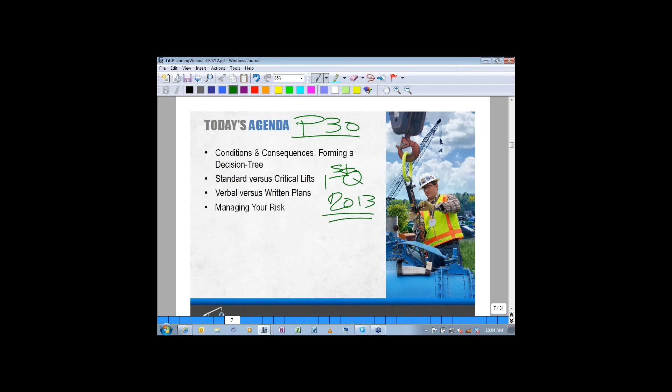Some of these efforts you're going to see are sort of roundtable discussions and general directions of where B30 is headed, as well as where ITI thinks we should be going in preparation for standard lifting activity and critical lifting activity. I want to give a lot of credit to my brothers in arms, you might say, for the brainstorming that's gone forward. I don't think any of this is secret information - we're not always original, but it is a format and layout that might be new to a lot of folks.

In part, each organization in today's agenda will be looking at forming a decision tree of some type, considering conditions and consequences. Then we'll be discussing quickly the difference between standard lifts and critical lifts. And of course there's some concern about verbal versus written plans, and then managing your risk. So we're going to charge forward. If you have questions, type those into your question box, and Zach will help me deal with the questions at the end of the program, and we'll get those cleaned up towards the end.

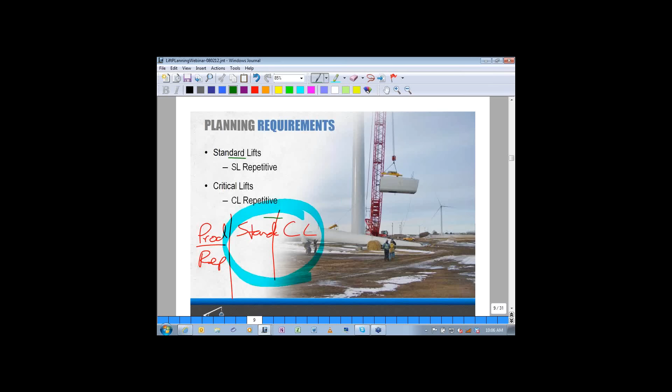So let's start on planning requirements. We had started - there's been much discussion about having 3 primary categories initially in a lot of the national discussions we've been involved with, and those were either production or what we call repetitive lifts, then standard lifts, and then critical lifts. Pretty soon it got clear to all of us that really there are 2 primary categories, standard lifts and critical lifts, because within the standard lifting family you can end up with repetitive lifts in the standard lift group.

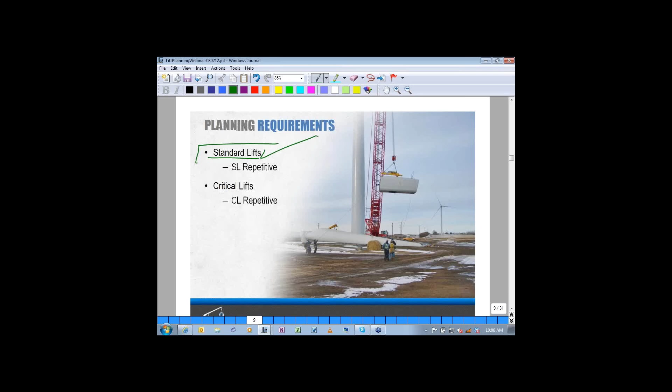So the suggestion is that in the standard lift category, there will be a subset of repetitive standard lifts. And very closely to that - it may sound odd to us sitting here today - but critical lifts, it may be in a nuclear environment or shipyard shipbuilding where it's a 92% lift, but you have to make 6 identical lifts one after the other. So we've also included under the critical lift group a repetitive category, or repetitive attention being paid to even critical lift activities.

That's kind of how the discussions flowed so far, and I think that's the travel path. Each organization, in effect, will be making up - and they do already make up - some decision tree. So we have a load handling activity. You'll see some new verbiage coming out in our industry pretty soon: LHA, LHE is load handling equipment, lift director, and so on. So we have identified a load handling activity, and we'll go through a series of criteria that we're going to see this morning.

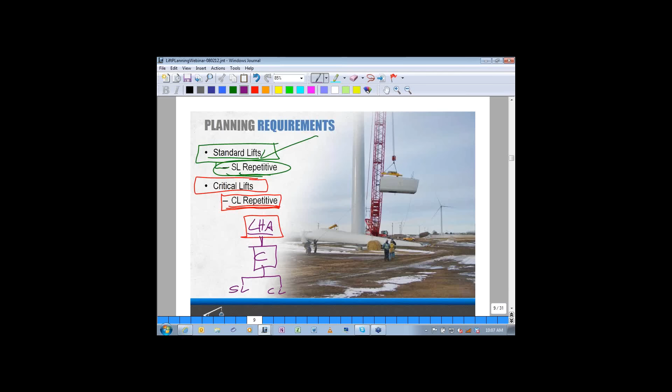And then the organization—here's criteria, and the organization may end up deciding if that's a standard lift or a critical lift. It all kind of gets down to what's the risk involved in some of the criteria that we're about to discuss.

The equipment that we're really talking about will be in some of the standard coming up in the future, as well as our current sphere of operations, because this can go from the wind energy group, our industry, to shipyard, ship repair, mining, nuclear plants, refineries, all kinds of facilities, indoors and outdoors, underground, horizontal work, all kinds of things.

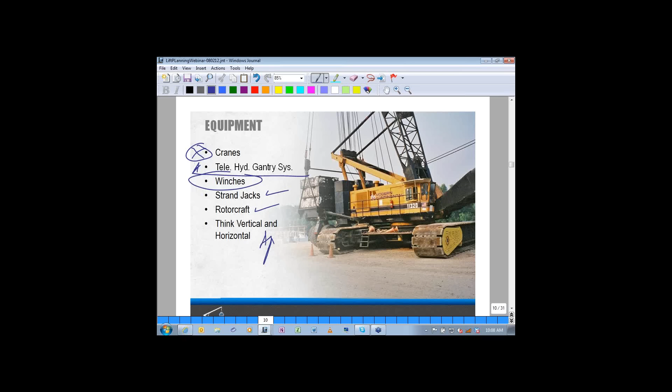So the typical equipment we're really dealing with, in large part, is cranes, mobile cranes in many cases, telescopic gantry systems, winches, strand jacks for large lifts where a crane can't get in place but strand jacks can lift the vessel up and work. It may involve helicopters, rotorcraft, and it's all about vertical and horizontal work, and critical.

And when we say the word lift, I want to get us into a mindset. When we use the word lift in all of our future discussions, I want us to be thinking about not only vertical lifting, but also horizontal work. So the word itself, I know it's a stretch, but it gets the idea across.

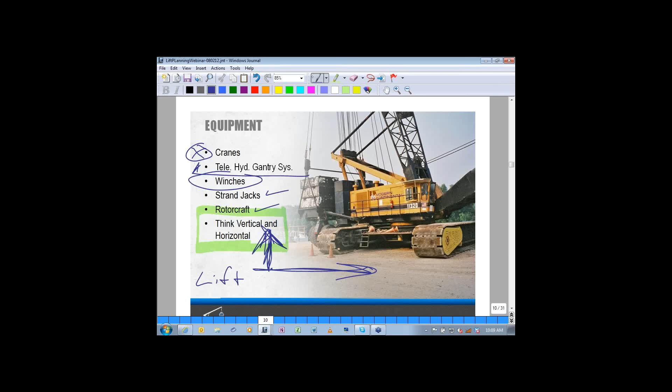Because a lift director involved in a winching operation that's taking a load sideways through a building still carries the connotation that we likely have to jack that thing up, put it on rollers or air casters, move that load in, airbag the thing down, and/or jack it down. So lifting really does involve some lifting activity, but don't get too wrapped around the axle about the word lift, because it will involve vertical and horizontal activities.

Let's take a look at some things we'd probably exclude from planning activities, because a lot of these types of equipment may not have—you have to ask, do these other kinds of equipment really have the design factor we're really looking for within that equipment? Is it built for the type of handling activity we're looking for?

In some cases, does it have a redundant system in it? Maybe multiple braking systems, et cetera. So there's almost always going to be an exclusions list that we wouldn't want to be producing for what we'll call load handling activities that aren't dedicated equipment.

So we kind of look at an automotive jack or a portable automotive lift system, PAL. Those likely fall out of the standard lift and critical lift family, because they're dedicated to a specific type of work activity, and they have specific manufacturer's instructions about capacity, setup, inspection, and operation. The only thing we're really supposed to be using those for is a specific set of load types in a restricted environment. So you'll always see an exclusions list.

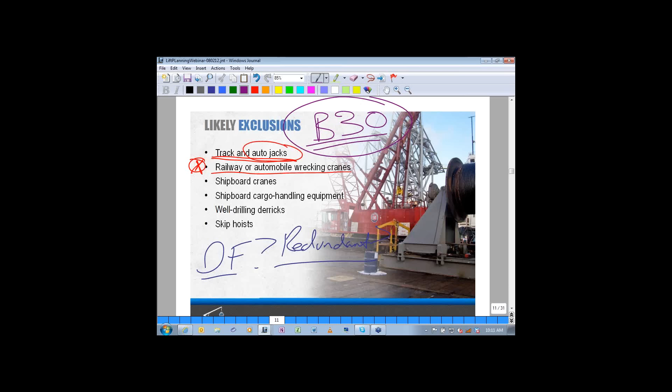Wrecking operations can be kind of Katie-bar-the-door—we have all kinds of inclines and hazardous conditions, road activities. Doesn't mean it doesn't take planning, but in a lift planning document, in our environment, it really is going to work under the approved list. I could drive you back to see the equipment listed in the B30 series for load handling machinery and equipment.

So most of the time these wreckers come out of that. Shipboard cranes typically aren't under the B30 family—it's really ship deck cranes, et cetera—but we will find portal cranes on dockside, or barge-mounted cranes, floating cranes. We certainly have those within the B30 family, but shipboard cranes on freighters and things will typically be outside of it. However, there may be times when heavy haul ships are moving transformers and other equipment, and the lift planning process will be incorporated into those for your particular activity.

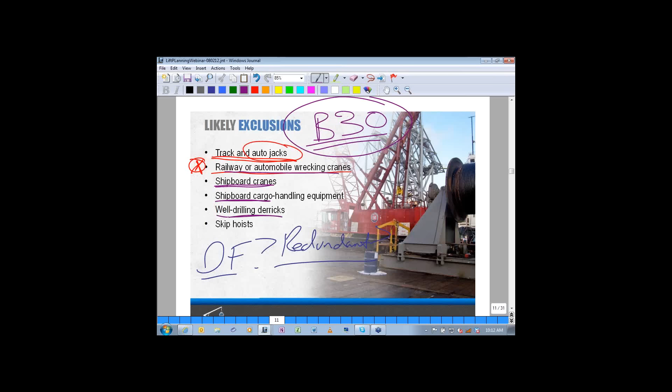Well drilling rigs, skip hoists—those are typically very dedicated to a specific task, and those will be outside of this little agenda. The balance of the list you can see as well: mine hoists and truck hoists, barge pullers, conveying systems or dedicated systems, excavators. Almost always dirt moving equipment is outside of the standard lift, critical lift family because we're lifting unspecified amounts of weight in unspecified volumes in some cases, and so the control method is very difficult.

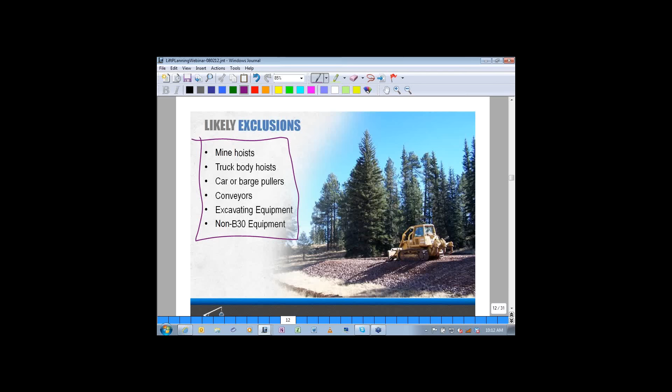So we really kind of work our way away from using excavating equipment for load handling for standard and critical lift. So any other non-B30 equipment, as I stated before, that's probably our biggest target—the B30 type equipment.

Here's a new phrase, as I've introduced in a few webinars in the past—you're going to see some new acronyms over time. Throughout this entire proposal and the thinking coming forward with a number of folks within these lift planning documents, you'll see this phrase LHE, load handling equipment, which will be that first list we offered up with cranes, telescopic hydraulic gantry systems, strand jacks.

And so all of those things will be called out within the volume downstream. Our current thinking is those will all be termed LHEs, and as applicable to your environment, that will mean a crane, a mobile crane, a tower crane, an overhead crane, a gantry crane, and so on. And when using that crane, these are the guidelines to follow.

So here's a new phrase in front of us that we'll be seeing quite a bit of across the industry, as it starts to enter into other documents. We have a new term, lift director. We've seen this term pop up in the ASME B30.5, in the 2007 revision, and now we have a 2011 revision out on the street.

They identified 5 key players, which we've had some discussion on, part and parcel in previous webinars, and that was lift director. For their case, it was crane operator, crane owner, crane user, and site supervisor. Those are the 5 primary folks that they identified early on.

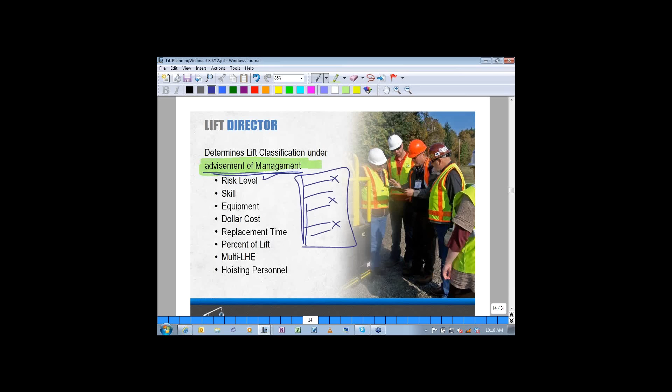This is one of the things I'd like for you to take to heart: on the advisement of management, management will end up with a risk tree, and they may decide, based on a matrix, if we hit 3 of these points, and based on their insurance and liability, they may say well, this 4th one here, okay, now it's going to be a critical lift, and we're going to need the lift director to get involved.

And he's helped make some of that decision for them, but I want you to get the idea that it's not all riding in the hip pocket of the lift director to make that individual call every time. We really want to make sure that management is deeply involved in the decision process, tasked to protect the corporation, its shareholders, its equipment and its assets. They will likely, as a group, be involved in deciding standard lift category and critical lift category.

The lift director in particular will want to be able to identify the skill level of the personnel involved, and also the adequacy of the equipment. Is it okay or not okay? Are we using the best machinery here for this lift, or an acceptable piece of machinery?

He may end up creating an options list: instead of using a 550-ton mobile crane, he may opt to come back to management and say we'd really rather invest a little more money here because it's safer to put in a telescopic hydraulic gantry system. So his job is to know all about different LHEs, and he may propose back to the organization that we may be using the wrong tool for the wrong job here. Let's put another type of machinery in, and it'll maybe save us some money, but certainly potentially save us some time, and most importantly, probably drive the risk down and increase the safety part of it. He may be involved in the dollar cost estimations.

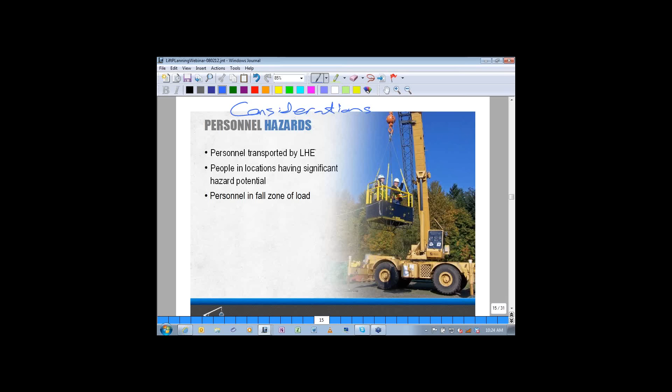Our friends in our industry are going to make some of these decisions, but almost everybody would say, at least when we're transporting folks with an LHE of some type, that's going to call for some critical lift plan, and we would highly recommend that. I think all the folks I've met around the table with in the last 2 years would certainly stand on that as a good, strong advisement.

Then it gets down to how management and local site supervision feel about their risk level and comfort level when we have folks in significant hazard potential. That might be somebody down in a hole who has to work and make a connection. We're about to lower a big object down and place it, and we've got to mount it up on a bolt pattern, and at some point we've got to access that to get it placed and landed. So the load goes down inside that chamber, and at a certain point, maybe 1 foot off the base, we have a ladder access, and we send an employee down to make that last connection. So he is in a potential hazard area.

Many times you just have to go do the work, and sometimes somebody's going to have to be in that area to make that connection and jump, deciding when do we consider that a critical lift activity, or is it standard lift because we do it all the time. The main thing there is we don't want to give a swing motion with that crane, or boom up and down, and send that load crushing into the wall and potentially injuring that person.

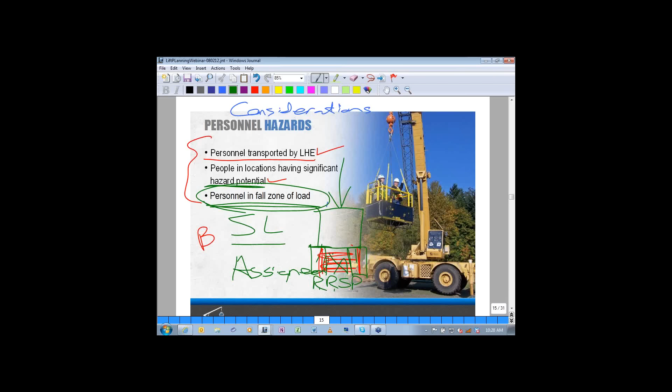So there may be provisions for how we deal with folks in the fall zone of the load. Construction's very typical - we'll fly loads and beams over folks, and it's about avoiding that long-term hanging part. Sometimes a passover is going to happen no matter what we do. You just can't get people out of the way, but they need to be assigned to the rigging task and the crane activity.

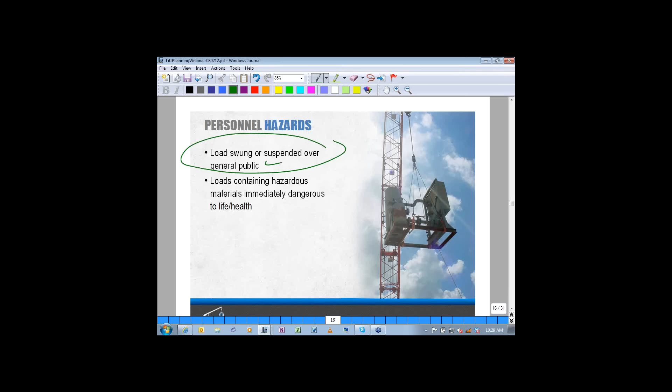Personnel hazards that get considered also certainly would be for things that are suspended or swung over the general public. Quite often this will likely fall in the critical lift category, not the standard lift category, and that will be up to management's decision.

It certainly happens a lot - I'm downtown New York today, and lots of tower cranes up taking loads off of street level and taking them up 20, 30, 60 stories. But they'll have a landing zone or work zone that's completely barricaded off. The truck pulls into it, we pick that load straight off, and this entire area is completely coned off so that flight, the vertical elevation taken over the building, is cordoned off so the general public isn't over or underneath that load while it's flying.

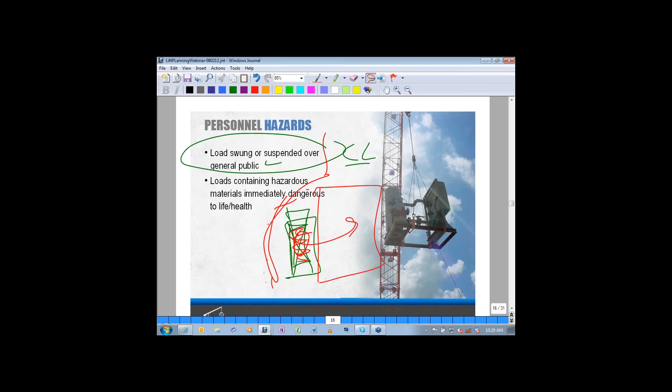So some of those considerations have to be made, and we're looking to try to reduce the risk to the general public and certainly to the employees as possible.

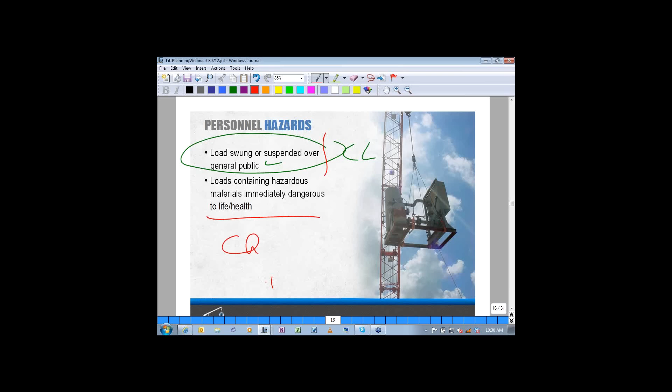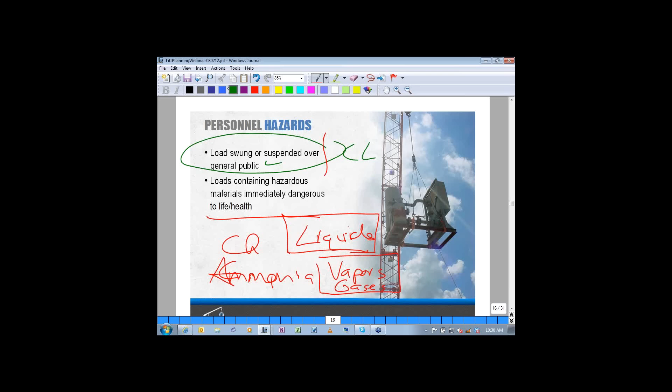So loads containing hazardous materials - that might be chlorine, or we've got folks that work in chemical plants with ammonia, sulfuric acid, all kinds of things. A lot of times you'll hear folks have a particular critical lift plan with precautions for things that are liquids versus vapors and gases. That may fall, in some environments, into the standard lift category for liquid, and maybe into the critical lift category because of vapors and gases.

Because if that is punctured and we do have a release, and we have to evacuate a certain part of the community, then most folks are going to decide that when it falls into that category, we're going to be writing a critical lift plan and make sure all of our homework and data has been gathered, and we're going to perform exactly to the plan when those conditions arise.

So this is the decision tree point that management groups will need to be going through, and this will, I believe, end up in front of us in a year and a half as some of the documents come forward.

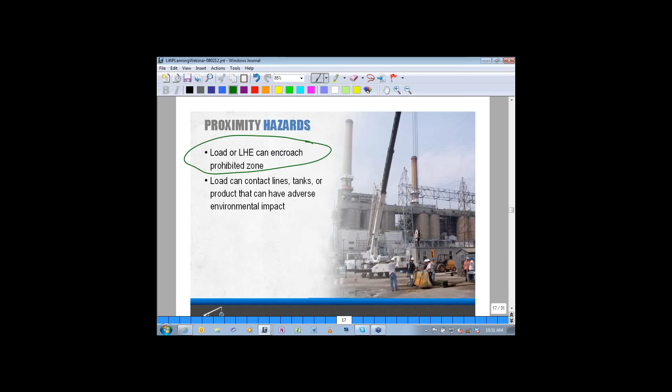Proximity hazards, of course, we all know about the prohibited zone with power lines, and this also talks about process lines, tanks, and a work product that can, as we just discussed, release gases and vapors into the atmosphere and environment.

So it's not only for electrical shock - proximity hazards have to do with things beyond electricity that can get out and get people hurt as well.

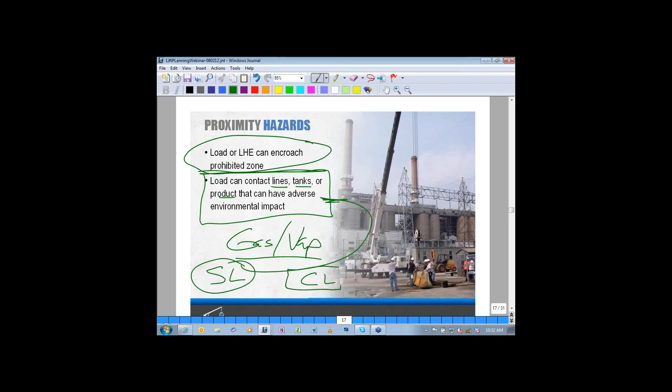So where does that fall in your organization? Sometimes we work with folks who say, heck, that's a standard lift for us every day of the week for this kind of lift. For some folks it scares the living daylights out of them, and it's a critical lift no matter what else is playing. Also proximity hazards include radio frequency, electrical discharge and shock, and those things.

We just covered that, so let's move on to complexity of lift activity. And this again is the decision tree.

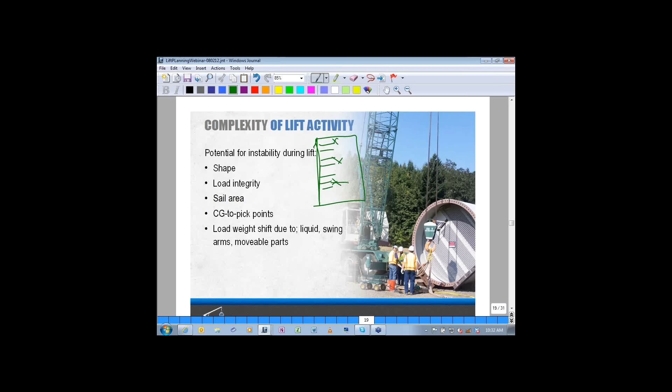So folks will be potentially looking at these as bullet points and deciding we got one of those, we got one of these, we got one of these. All of a sudden, it's into now critical lift planning. So that's the listing we're really looking at. And in this case, for complexity of activity, just the shape of the load, these are sort of intertwined. Probably no single item here is going to immediately cause us to go to a critical lift plan over a standard lift plan, but it's all about potential instability during the lift, which could be shape.

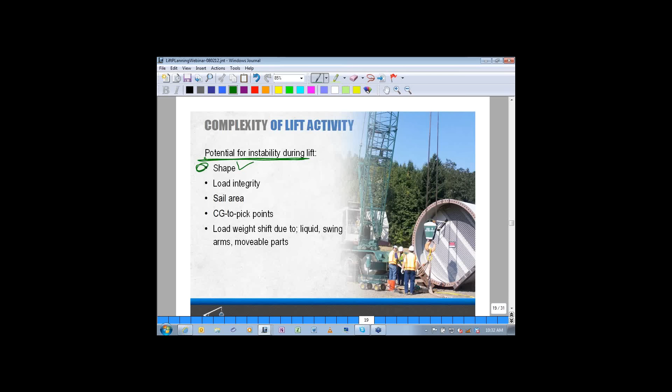And I'd kind of tie this thing to shape, and sail area has a lot to do with that. I know Larry Shapiro's on our B30 committee, and he's done marvelous papers and presentations on wind loads on cranes and on suspended loads. As the bigger the load gets, the bigger the sail area and the higher pounds per square foot of push ends up as a huge issue.

I just worked with a client here in New York. They're on a 77-story building and looking to fly panels off, and have opted to take those panels up to the top of the building and then dismantle them, taking off all the sail area except for the steel beams, then lowering them back down. So they won't be flying these big sails and try to skinny them down right to street level - they'll take the sail area away. So they've opted to call that a critical lift plan when they're moving it up, and then it'll be a standard lift plan when they take those beams down because they'll be in a very minimized sail area.

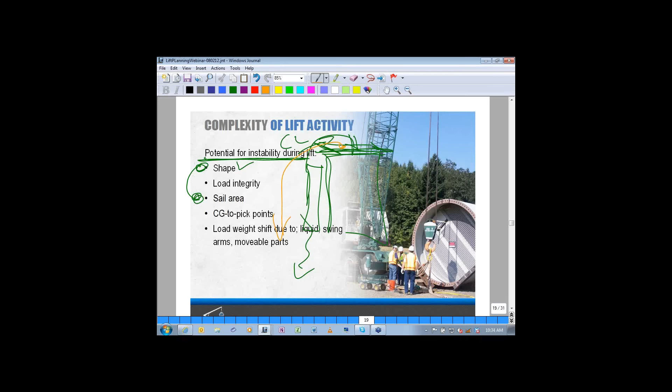So each one of those is going to get into how do we approach this work activity and how is this going to affect, and what's our potential for instability and potential for injury.

The load integrity is also another one for complexity of lift. We know that loads come in sometimes and they're crated. They may have a steel frame base, and they could be in the 100-ton range, but they're on a big skid or flat rack, and how those get rigged up certainly can cause issues. In this case, certainly we'd be looking at likely a spreader frame up above to be able to rig and to come down off that spreader frame to avoid crushing or doing side load damage.

So with load integrity, we may have very specific lifting points that are going to maintain the integrity of the load, and not do damage because we've misrigged it or used a different rigging method that's going to cause injury or damage to that equipment.

Obviously, center of gravity to lift points - I hope Jim Meehan is on line with us. Jim is owner of liftplanner.net, a great website, I'd encourage you to go take a look at it. Jim was involved in a project a few years ago lifting a statue up off of a state capitol, and I'll tell you, it's really difficult when you start in with a high center of gravity load, and there's almost nowhere to rig that except at the base.

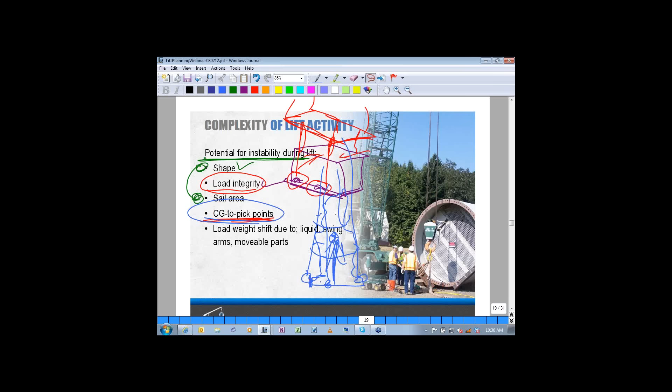And then, of course, we've got things that can go awry in a lift activity. And that's another consideration point - is there anything that can move, shift, or readjust itself while we're lifting or moving it? So we know we have loads.

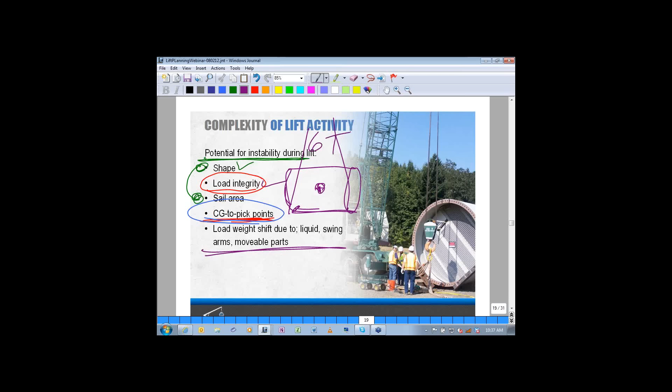Sometimes we're called on to move tanks with some liquid in them. We just picked up even a small one the other day, probably about 6 tons, and it probably had 300 gallons in it. But it did make some change in the center of gravity as that just reorganized itself at one end. We were really well rigged all the way through, but out of 6 tons, 300 gallons isn't much reaction, but it will certainly move that center of gravity. And if you can't evacuate that, it can cause some problems.

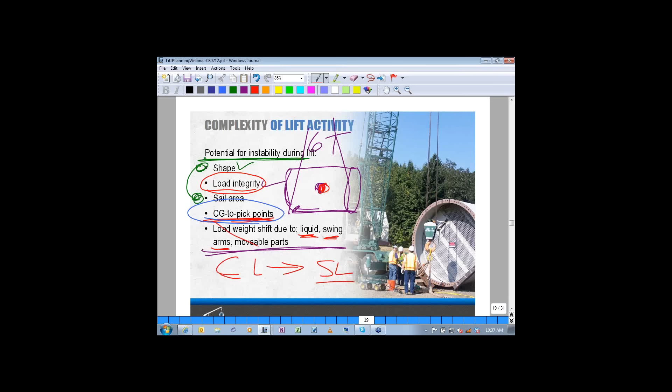So anticipation is really the secret answer there. Draining anything out or securing anything that might move in advance could actually take it out of the critical lift category, move it back into a standard lift category, if we can say, okay, that's going to go away because of these prior actions.

Let's take a look at the next one, complexity of lift. Are we using complex load handling systems or methods? In some cases they may be new machinery, things we haven't used quite often, or it's new technology on our work site.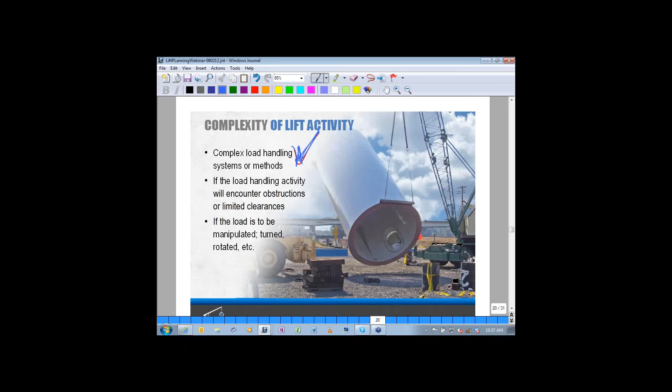It may be a transfer where we move a load from a gantry system to a mobile crane. That can present all kinds of issues: where's the center of gravity, how's it supported, how are we taking care of horizontal movement. These all play a large role, and typically in those situations we will likely get into the critical lift family and not anywhere near the standard lift effort that some folks might apply.

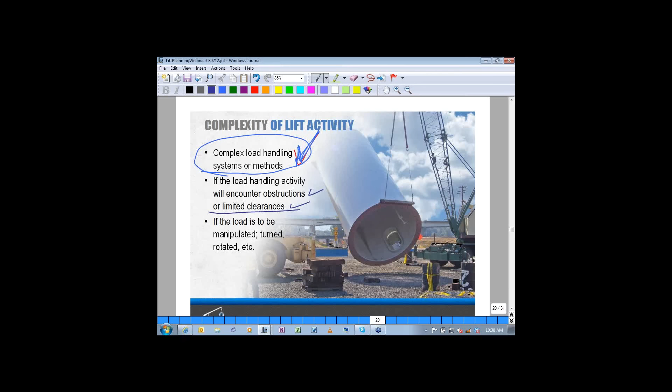If the load handling activity can encounter obstructions, that just means tight clearances, tight areas, and the load may be skinny enough. We've had loads going through with 1-inch clearance on the left side and right side. It takes a lot of pre-anticipation with what any wind might be inside a building. If we open a door at one end and another door at the other end, we get a huge wind tunnel effect. Tag lines obviously have to be used in many cases.

It could be a multiple overhead crane lift, so clearances can be a huge issue. A critical lift plan will drive us to plan and talk and make sure we're able to discuss everything with all the members and operators so everybody's on the same page. I think that's the best side benefit of a critical lift plan: the discussion by all the parties involved, and it's really, really important for the successful outcome.

Let's take a look at the last one on our page here. If the load is to be manipulated, rotated, or turned. I got a good call the other day on load handling with 2 hooks on the same mobile crane, something that is done quite often.

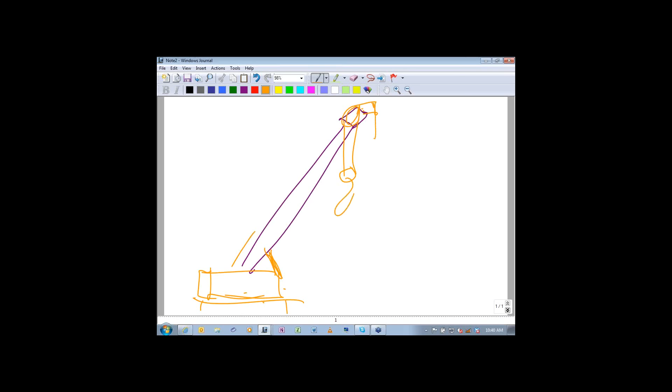So in this case we have a rooster assembly up here, coming off a mobile crane down below with hydraulic outriggers, the whole works. We're lifting off the main block, and then we have the rooster assembly, and we're also lifting off the headache ball. These are the kinds of things that, when these devices get down, we had to actually get manufacturer's approval to do a pick and turn the other day.

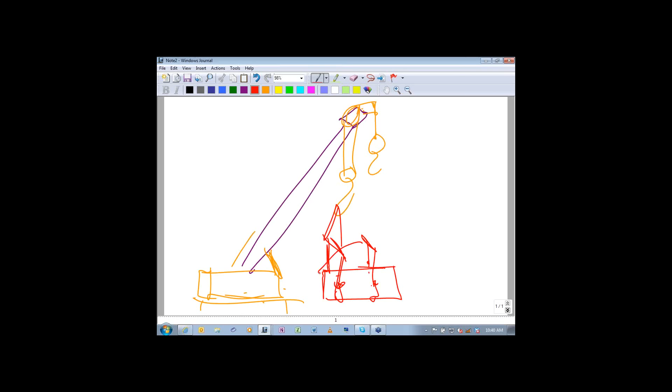We rigged up to the center using a spreader bar to make sure we didn't end up with sling edges contacting the load, and then we rigged up the whip line with another spreader bar at the far end to make sure this could also clear the top as we started to make that pick and turn.

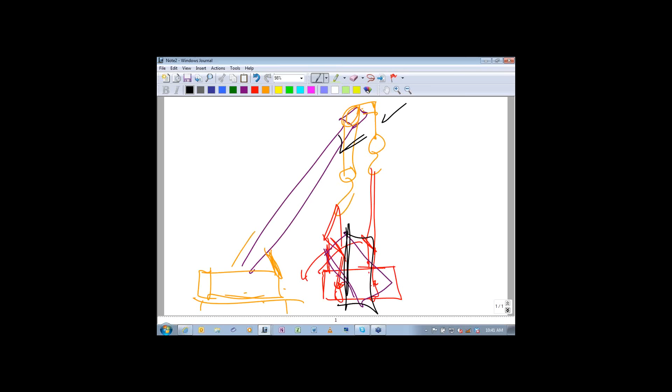So this entire unit was going to be taken from this orientation, turned up, and finally turned into a vertical orientation. To do that we had to get manufacturer's approval because we had to check the lift, double-check the load handling requirements of the whip line based on the tailing operation, check the main hoist for the header operation, and make sure we had clearance for all the slings and rigging to be able to upright that, and to get their approval to use 2 hooks at one time.

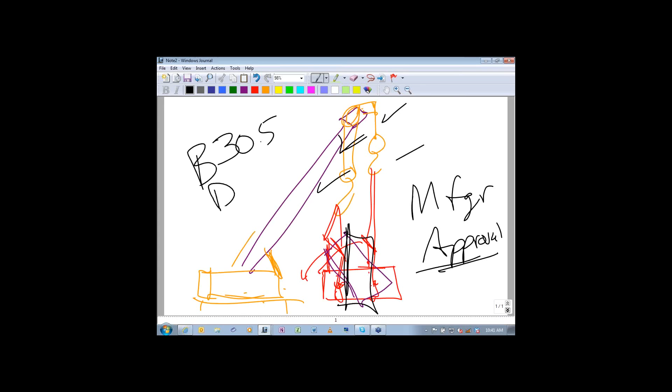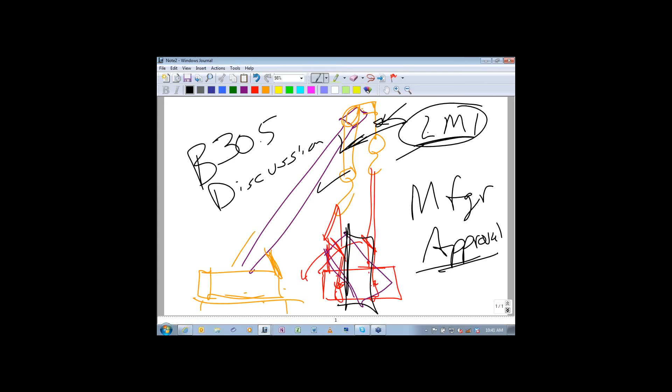So just load turning is pretty complex, and it can get you in a bind pretty fast. I know a number of folks we've done investigations for end up cutting the rigging because they didn't use spreader bars—cutting slings as they make a rotation or turn-up, and all of a sudden the slings go around the edge of the load and cut the rigging, dropping the load. This is really a complex activity, and I'd really encourage folks: don't just go out to the backyard and say, well, hold my beer and watch this.

This is something we really want to take precautions on. Anytime we're talking about load turning or rotating, manipulating the load, it may easily go from what some folks might consider standard to go into that critical lift category. And then finally, with the complexity of load handling activities is the multiple LHEs, as we described before.

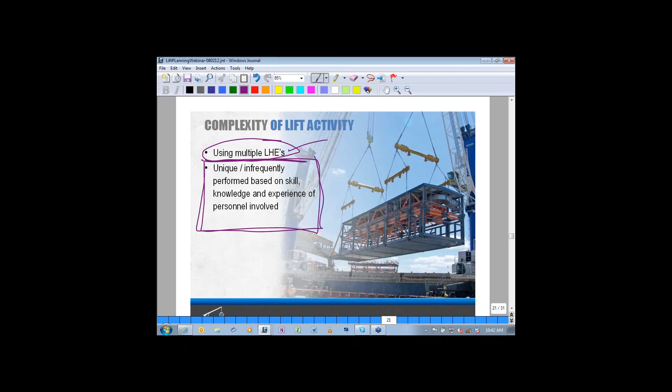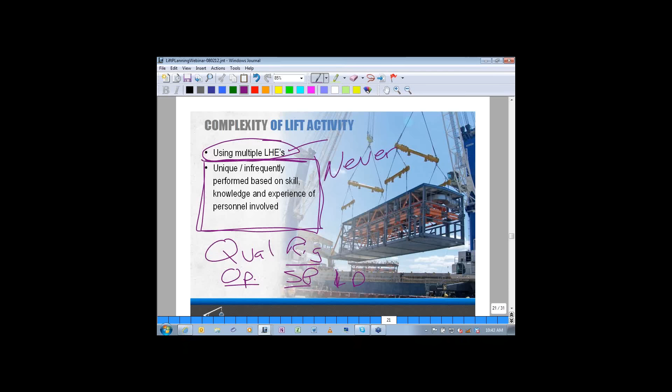This is kind of a new category that a number of us in the industry have talked about. It's not that our folks aren't qualified. We have qualified riggers, signal persons, operators, the whole works, serving in most all of those roles, qualified lift director. But it may be getting down to a situation that this event coming up has never been done, and that should already send up a bit of a flag for consideration by management groups. Or it's something that was done 12 years ago, and we have nobody left in our facility that was around and actively involved in that when we did it 12 years ago.

So to say that it's a unique item, yes, it's infrequently performed, and there is some evaluation. You want to decide, do we actually have the skills, the knowledge, and experience of the personnel involved in this to be able to accomplish that? That's where a good lift planning activity will really knock down a lot of those things, because they understand center of gravity, load manipulation, LHE capacity, all those things start to play. If they just haven't done it for a long time or never been done, doesn't mean it can't be done. You just have to slow the circus down a little bit, and let's get our planning in place and do it right with the equipment that we have.

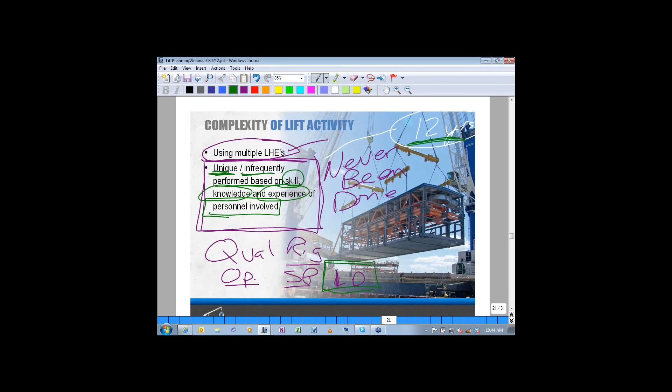It may also be a place that you hire a contractor to come in, or an outside lift director that's done that kind of work before, and so an outside lift director may be able to come in and provide some good assistance. And there are a number of those types of groups out there. I know Kevin O'Neill with Seifert Associates works with us on the P30 group. There's Steve Sparrow. There's a number of folks around the industry that are heavily involved. And folks like Jim Yates at Barnhart Crane and Rigging, they'll come in and do some advisory group and consultation with folks. So there's a lot of ways to skin that cat, and sometimes this particular category might be helped with some assistance from some other folks.

Let's take a look then at impact of environmental conditions. Remember, all that we're really doing is working down this list, a decision tree. Do I go this way to decide standard lift, or do I go this way to decide critical lift? That's what we're really talking about.

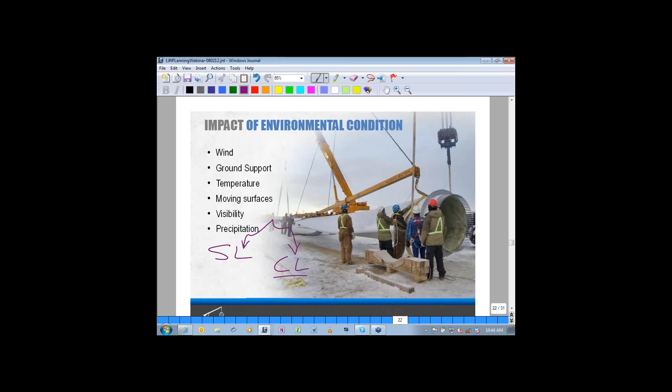Wind, you may know your wind limitations, certainly on wind farm construction for turbines. They'll get into sometimes approved higher capacity or higher wind speeds. Most of the time it's 20, and they may have provisions to go to 33 miles per hour or the equivalent. In some job sites, because of the approval by manufacturer, they'll be allowed to go up to some higher value, but only when a critical lift plan has been put in place. So those are considerations. You want to stick with your existing wind restrictions for your LHE, and they would only be negotiated to go higher with approval by the manufacturer. This isn't anything to mess around with. We know wind is a big deal, and it can really have a detrimental impact on us. So it's something to take into deep consideration.

I know that there are probably a dozen folks that we rub shoulders with in the industry that do ground bearing pressure evaluations. Zach, I think we had a question on ground bearing pressure in the initial sign up for this webinar. This isn't something we want to just go out and stomp our foot on the ground and say yes or no to. We're going to often need geotech support and end up doing some serious evaluations of the area, and we'll need to have some professional service groups come out potentially and do some evaluations for us.

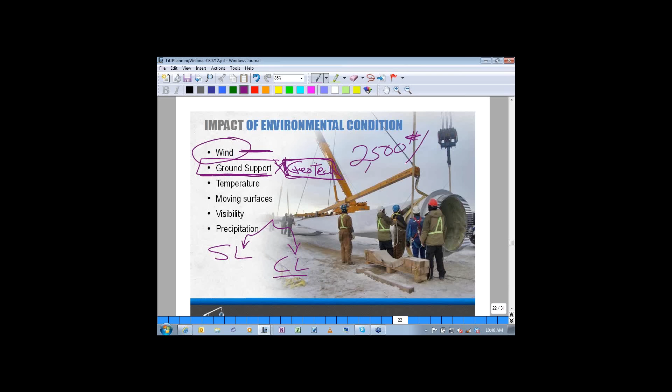I'm working with an outfit, a good client down in Louisiana right now. They would like to restrict all their lifting activities to 2,500 pounds per square foot. And it can be difficult. It creates a lot of matting, a lot of crane outrigger blocking and matting and spreading that load out, but they work in some swampy conditions or marginal conditions.

Sometimes an entire site will have a restriction as to their maximum pounds per square foot, and we have to live within those. That may apply to standard lift activity, to achieve any lifts that are going to impose greater than that given value. We may have to go into a lift plan and get an engineer's approval to do that.

Temperature has some big impact on our lifting conditions. Moving surfaces, this typically is water. So we're lifting on and off water on barge cranes to dock, dock cranes to water, tide issues from barge to barge, moving vessel, floating vessel to floating vessel. All those things can get involved in some environments.

Some folks work with that as a standard lift. In many cases, other folks that find it a little unusual want to move it into this critical lift category. Visibility is always an issue, and precipitation - we won't spend much time on that, those are pretty obvious - but radio communications is key and critical.

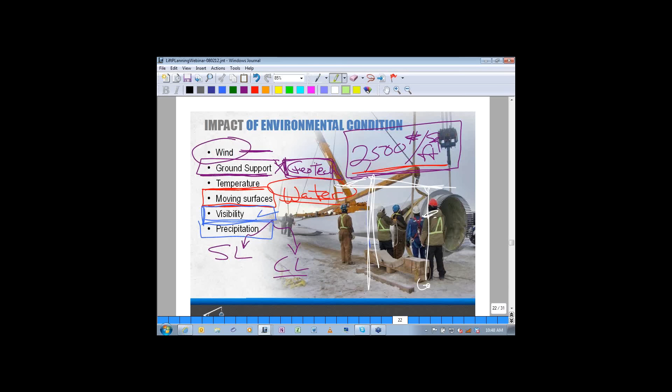We know that when we get a 300-foot tower crane up here, and he can't see anything when he's lifting a load up from street level up to the building level, he may easily have an entire fog bank below him. Everybody's out of sight, and everything is all blocked out.

So a lot of times visibility is going to be some issue in many cases, and that's where we're going to lean on the technology for drum counters, rope counters, trolley measurement, hoisting speeds. All those things have come into play. So the operator, the lead rigger, and lift director want to be tight in communication with how we're approaching those load handling activities. This sounds kind of funny, but potential to exceed LHE.

Well, when would we ever do that? Well, sometimes it happens. I've told a lot of clients - we had a really good client over in Saudi working, and as we started lift planning discussions with them on certain tasks and activities, installation is almost the simplest of all work. We pick up a 10-ton load, pick it up, go over and set it down, no big problem. We understand the radius or distances we've got to travel that load, et cetera.

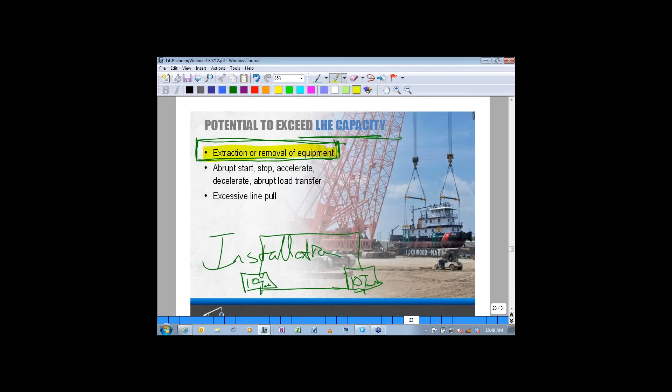But I'll tell you, when we get into extraction and removal of equipment, sometimes folks, if they can't use wedges or jack screws to get things broke free, end up using the crane or a gantry system to actually separate that piece. So there's likely going to be a time when they're going to actually exceed that load's actual dead weight - let's call it 10 ton - they may for an instant be in the 12-ton range, and it's going to be a big deal confirming, can we take that extra load for an instant while we break that thing free, because that may be right at the end or limit of that LHE.

So when we start extracting things and removing things from service, it's quite likely to get into some small overload, and if we're already at 100%, we could be in big trouble. We can really do some damage to equipment and have some catastrophic failures or catastrophic events as a result. So it's a particular category, and you really want to pay attention to it - it's a consideration point you want to keep to heart, because it's a place to easily get into overload of equipment.

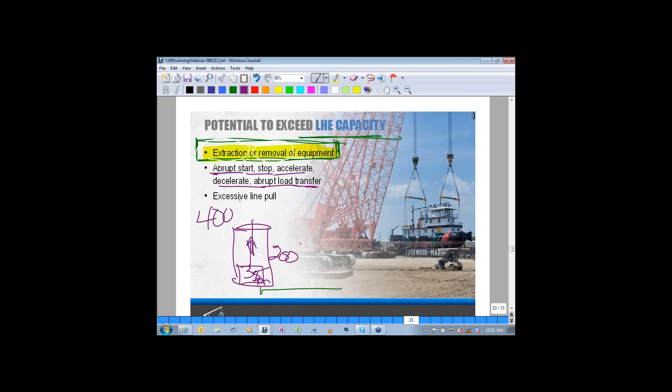We know that abrupt starts and stop acceleration - we worked in Texas this summer down in an area where they were sinking a 200-foot shaft, and they were removing 35-ton buckets of muck. They were doing a tunneling system, hoisting all at one time, then sending those buckets back down. They were able to work at 400 feet per minute on their hoist. That abrupt start and stop, if it ever happened, could do a lot of damage to that crane, number one, but also the hoist system, boom hoist, main hoist.

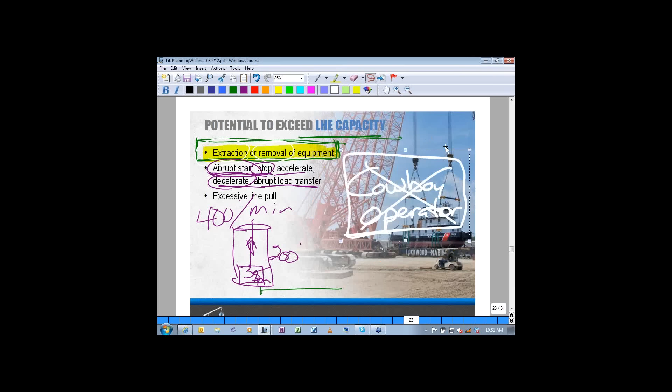Everything starts to take a shock, and you really want to - God love everybody here - but cowboy operators, if the guy gets up in the crane with big spurs on and goes yee-haw, you probably want to go pick another operator. Things can really happen fast, and it's not about speed. It's about condition of your equipment and taking care of the people working with you. Let's not get too out of control here - slow and steady wins the race.

Some things we share with our clients: out of a complete crane and rigging job, about 90% of the time is spent making decisions, determining all the information, getting the crane organized, getting the rigging attached, and doing all those things. Then about 10% of the time is the load actually suspended.

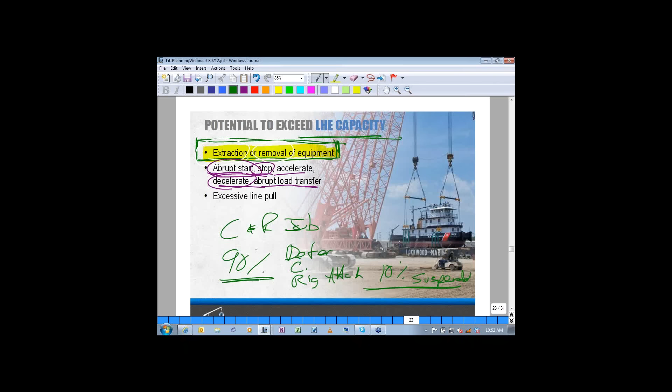If you take that kind of approach, 90% of the time we're spending minutes, if not an hour, to get everything ready, and then 10% of that time is spent actually hoisting or lowering that load. This is no time to be fast. This is absolutely the time to go slow for this 10%, because that's when acceleration, shock loading, dynamic loading, everything starts to happen pretty badly and things get out of control. So we've already burned up a lot of time in this preparation, and there's no reason to try to gain it back while we're suspending everything.

So slow and steady wins the race. I can't tell you how often we get called for accident investigation when somebody really wants to get too happy, too fast, too quick, and all of a sudden they paid a really severe price for it. Certainly in that same type of work, we can have excessive line pull, which leads to overloading a lot of equipment in a hurry. So slow is the way to go.

Potential to exceed LHE is also something we want to double check, along with brake settings and clutches. Are they able to take all the things we're asking of them? Accuracy in weight estimation is going to keep that LHE standing up, not falling down.

What is the equipment history and condition? We all know that cranes ought to pass their annual physical and all the monthlies and dailies that take place, but we do know we have some older equipment in place, and there may be locations we don't want to operate that equipment because it may be high cycle or duty cycle activities.

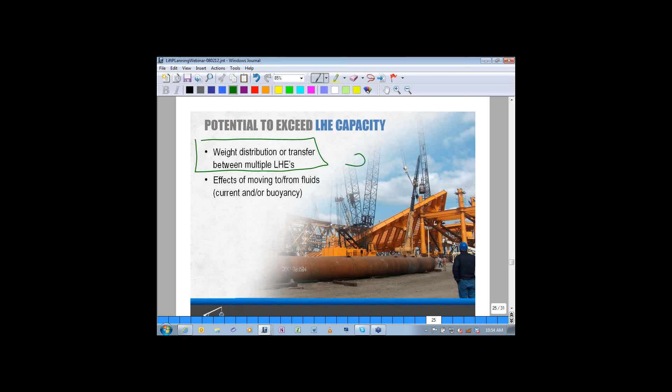Let's go to the last one here, weight distribution—that's transferring load from one LHE to another, and or as it's lifted or tilted. Sometimes tilting the load can change the center of gravity's position in relationship to each LHE, and can shorten it up on one side or lengthen it on the other. So those are all big issues.

Yep, I just put it on the screen. Does your company utilize a designated percent of LHE capacity to initiate a critical lift plan?

So it looks like we're getting a lot of responses so far. You might want to take one of these questions really quick. I think regarding crane setup, one was from Scott Ingham of Fluor, asking how do you do ground bearing calculations by hand? And the other one you were referring to—let's see—oh, any discussion on maximum outrigger loading would be essential. But looks like we got about 60%. I'm going to keep it open for another minute if you want to chat about any of those.

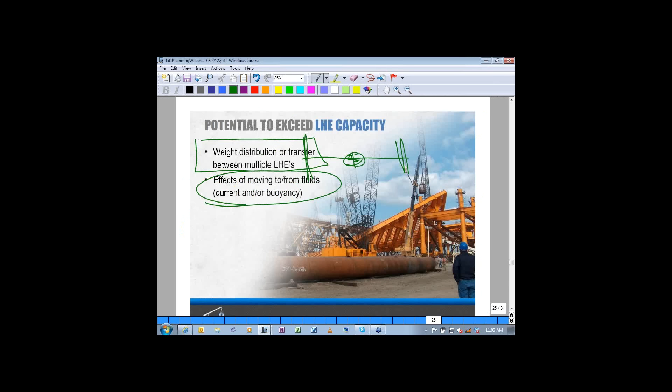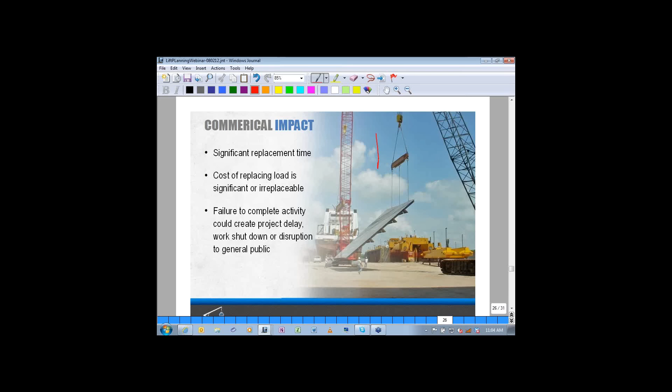Let me get back, we're just about done. I know this looks kind of funny to you as lift plan considerations, but it's definitely what can make or break an organization. As we discussed, at what point do we decide standard lift or critical lift?

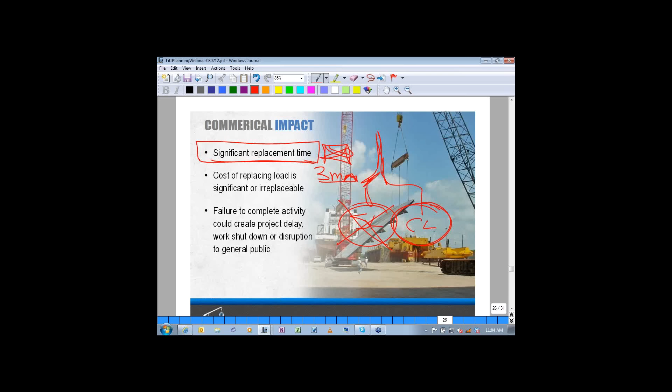This corporation may decide with the replacement time of X, if we don't get this replaced, if we drop this and we have a crash and burn and this thing's out of service, and if it takes 3 months to replace this, we're going to be paying a penalty of $4,000 a day because we're stopping a job. So that likely would go away from the standard lift category and immediately go to the critical lift category because the replacement time of the specific item about to be lifted or handled falls into extra attention, discussion, consideration, calculations, and engineering review potentially.

So the replacement time is definitely a big ticket item, and this is really your risk control, folks. We're going to get involved in this entire discussion about commercial impact on the organization actually handling the load. It's not so much that you can shove this off onto a contractor and say if they drop it, it's their nickel. Well, that's as good as their insurance policy, but it still stops the job and your reputation is still on the line.

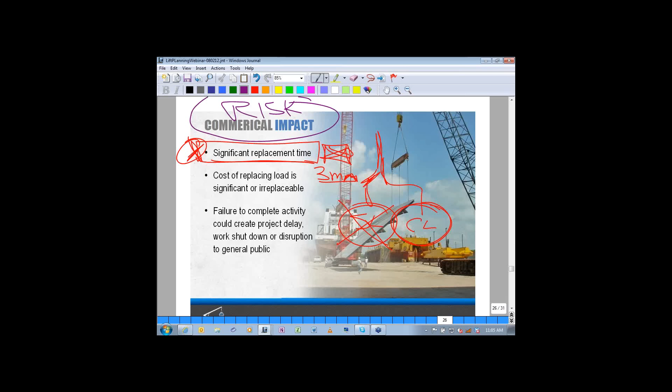So commercial impact, cost of replacing the load, and sometimes the load is irreplaceable, like it's a one-off and it's never going to be made again. That'll be a decision that might take that out of the standard lift category and over into critical lift.

And then failure to comply with it could cause a shutdown of the work activity or disruption of the general public. I know a lot of folks that do bridge replacement and bridge work, every time they're putting a bridge section over a major interstate, typically at night, doing all that deck setting, all of those will be in that critical lift category because shutdown of a major highway and interstate costs so many dollars per hour per day, and they won't mess around with having Billy, Joey, and Bobby going out there deciding to throw that across the highway and be good to go. They're going to have significant details with an entire team behind them to decide that definitely will be out of our standard lift category and into critical lift category.

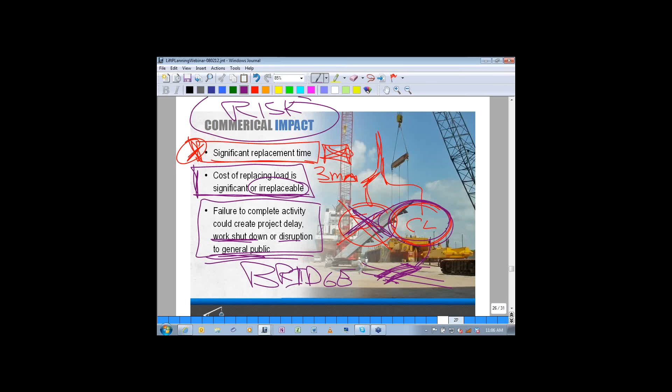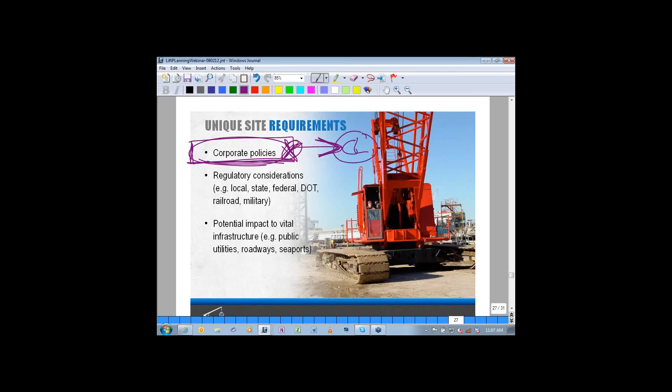Also, unique site requirements - this might be a nuclear plant, it could be a refinery. Corporate policy, worldwide corporate policy - I know that Shell, Bechtel, BP, a lot of folks have corporate policies that supersede almost everything happening at the local level. Given their guidelines, it may have nothing to do with OSHA, ASME, or the state, county, province, country. It's their corporate policy, and those decisions will generally drive folks almost always into a critical lift when there's a question versus a standard lift.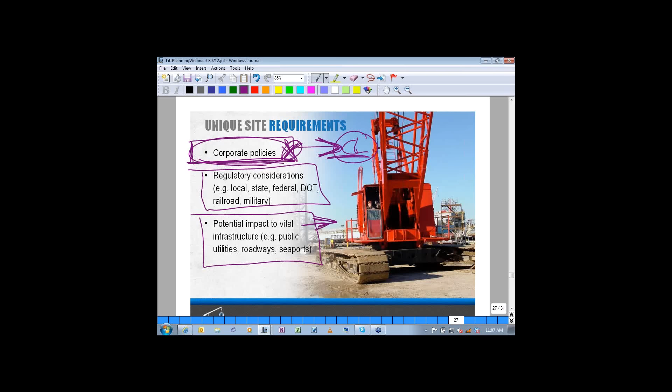We obviously have to attend to these standard regulations, and then potential for interruption with infrastructure - this typically will drive us to the critical lift family as well. So there's part of our decision tree starts to get answered. And repetitive lifting, as we stated earlier in our first frame, we can have repetitive lifting in standard lifts and critical lifts.

And this is what our current thinking is nationally on this: what falls into place and what starts to happen are these three things - complacency, fatigue, and distraction. And because of that, any of those can happen in either one of these categories, standard lifts or critical lifts. We're going to want to put something into place that helps take away the risk related to complacency and fatigue for folks swapping operators and riggers in and out on a long-term repetitive lift activity, and or distraction. We know what all those are about.

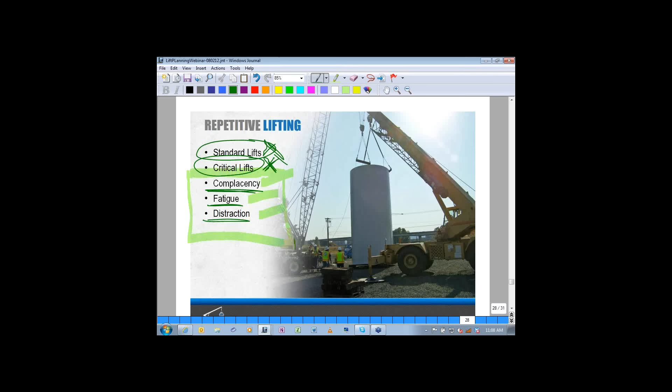So repetitive lifts can enter into either category, but because of the length of the project or work activity - it could be a 16-hour pouring job with concrete, or a 24-hour, 36-hour pouring job - they may call it a standard lift, but they're going to write a specific requirement for change out of personnel within a specific clock cycle, etc., to make sure they're maintaining a fresh look. Everybody's on their toes, doing their job, trying to minimize and lower the risk at all times, getting everything dialed down to minimum risk, safest operation, most efficient way to do it.

All right, let's take a look. This is something kind of unique that one of our customers requested. I was down in California, at a chemical plant - they make fertilizer. And so they said, can you help us? These are the things that mean the most to us, and these are what we run into in our fence, in our gate, this is our playground. These are conditions, and we'd like to have a look.

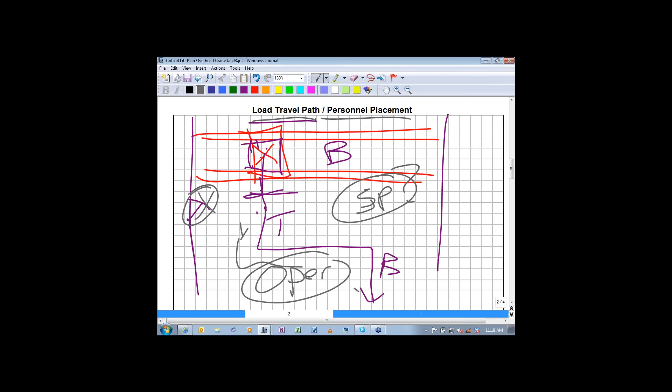I'm just going quickly here. What's the load look like, load schematic, and rigging method? We want to double check our rigging plan. We'll have a quick sketch, you can even do a photograph and lay that on top and do some sketching over it to confirm your load, and it may be 18 tons. We may have some known distances with it, and then we'll have calculations to identify the minimum rigging based on tension, whether there's a rigging shackle, and controlling with tag lines and so on.

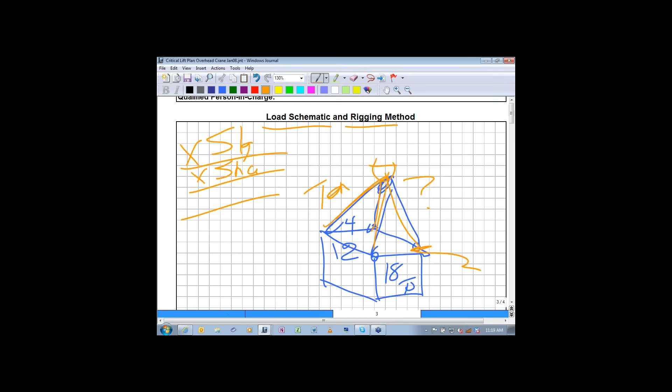So this load schematic and rigging method will be detailed out, and it will talk about X number of slings, shackles, and this can all get transferred to the front side of this document, right over here to the front bottom portion where we're gathering all of our data.

So you do a load and rigging schematic page, and then the last page is pretty important because this is actually where the discussion with the crew and the teams comes out. So item 1, 2, 3, 4, 5, and then we get down to: we want to barricade all the area. We've already alerted safety or security to help make sure we don't have any incoming traffic. We want to position the crane over the load center of gravity, attach the rigging, and it may be that we end up detailing who's assigned and responsible to do that, and it may be different folks assigned those tasks.

So it's a load handling sequence and procedures. It really goes down through, and this entire page is dedicated to, we're going to do this in 12 steps, and this is how we're going to do it. We might do a dry run to help make sure that this is all doable.

So there's a lot of different lift plans. Certainly these can be typed out, but in the field they may be handwritten in some cases, fill in the blank, making sure we don't miss any of the boxes necessary to achieve that appropriately. So I hope that gives you some comfort that not only can we do this as a standard one for mobile cranes, which we've always seen a lot of, but we can do that for overhead cranes.

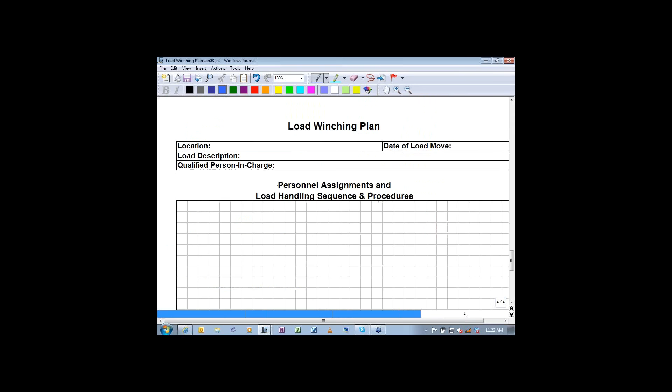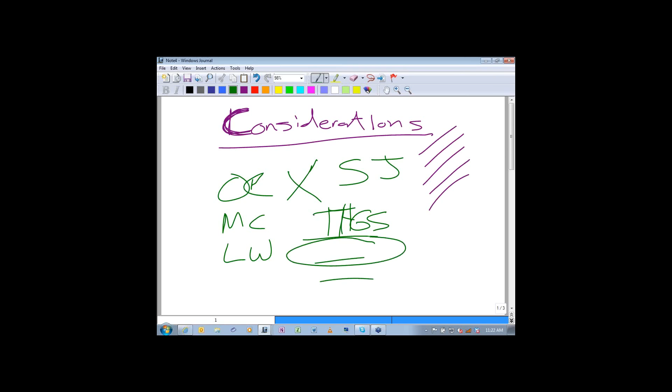So regardless of the LHE, we still have to move that load from one area to another, and we can substitute those forms I just showed you - overhead cranes, mobile cranes, and load winching can be substituted with strand jacks, and can be substituted with telescopic hydraulic gantry systems. You just pick the piece of equipment, and that lift plan will work with that piece of equipment. Great question, thank you for that.

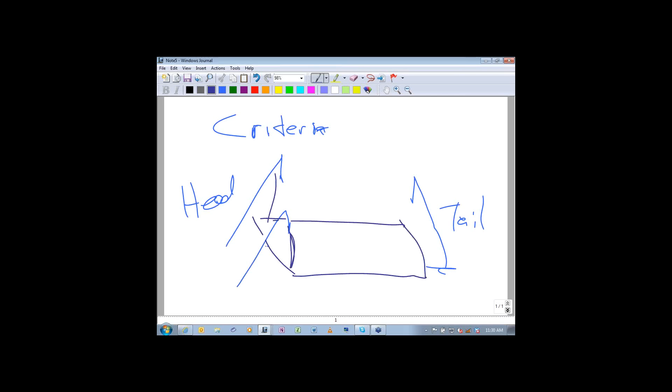Richard, I think the key is most management groups would make a decision as to how they're going, to what percentage. And I think the biggest issue is what percentage would we set the percent of lift capacity for each of these 3 cranes. Without knowing anything else at this moment, most folks are going to limit the capacity of the cranes, just taking a shot in the dark right now, to 75% of the capacity of the crane at its maximum working radius.

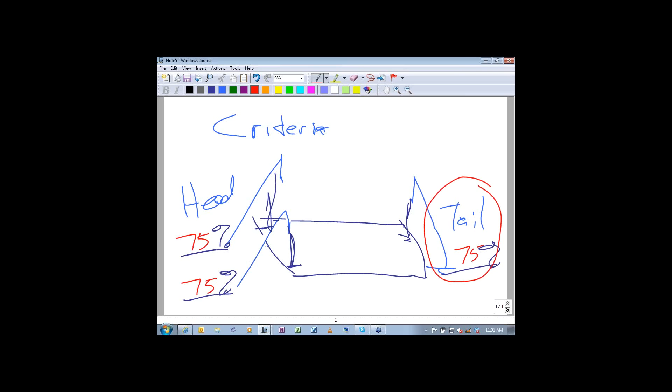This crane may actually have to crawl forward during that uprighting and heading and tailing process. No matter where this crane goes, generally a lot of folks are in the 75% category, and I don't really disagree with that. I know in some shipyards they'll work to 90%, but it's almost production lifting for them using portal whirly cranes, and they may run at near 100% lift, but they've got the ability to roll with the load and the load stays suspended under the main boom point. On flat ground where the bases are not able to keep up with each other very well and limited, the 75% could be 60, could be 80, but 75 is a good target point.

And if everybody's understanding, the biggest fear in the crane operator's and lift director's mind is that the hoist lines stay plumb, they stay vertical. Because if this hoist line starts to get loaded out sideways or gets pulled away, we are likely going to have a catastrophic event in most all directions. So it's about keeping the hoist lines plumb and vertical so that they're able to maintain their capacity with a target capacity.

That 75 is a fairly good starting point, and arguments can be made either way to go up or down with that, based on the machines, the operators, and the working environment and criteria. So if that answers your question, Richard, I'd say that'd be a place to start.

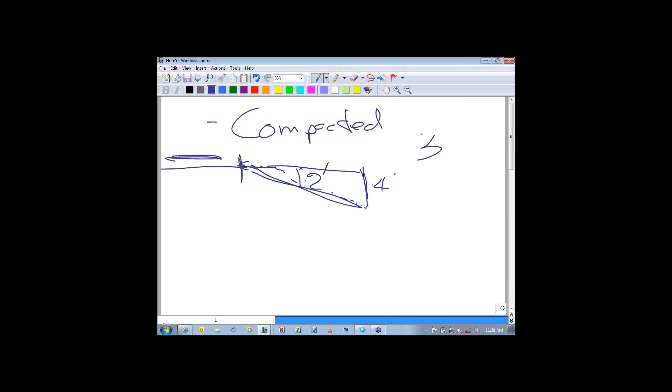That's a great question. If we have what we would consider compacted soil, there are some rules of thumb: for a 4-foot depth, it's a 3-to-1 type distance back for setting that crane up to be working. So at least 3 times the run for the 4 foot of height. That's a general industry approach, and that's really for compacted soils.

If we're working on less than compacted soils - and with compacted soil we're talking near 100% compaction - and this particular area is fresh excavation, so if the excavation comes back with sloping ground and some of this is disturbed, we're really going to need to be at least 3-to-1 back, if not greater. It is really dangerous - the surge and side thrust of that soil is terrific.

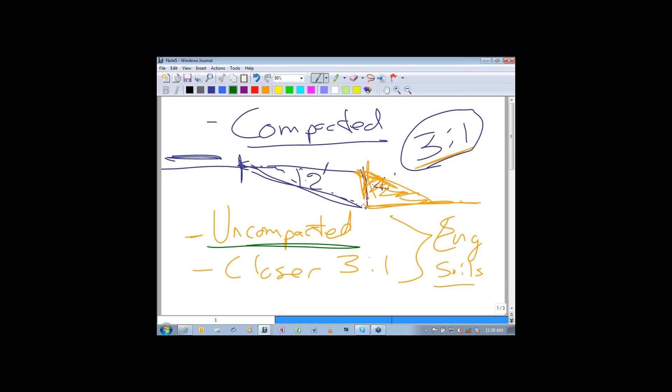If you have to work in uncompacted soil, backfill, or other conditions, closer than this 3-to-1 on compacted soil, we're really going to have to get a soils engineering group involved, like Seifert and Associates, Hague Engineering. There's a ton of groups out there, but they're worth their weight in gold, and it won't cost you very much. But once we get up to any of those conditions, there's no good rule of thumb because of the weight of the crane, the weight of the outriggers with the full load on the crane, because the bearing pressure is so huge right up at that front point.

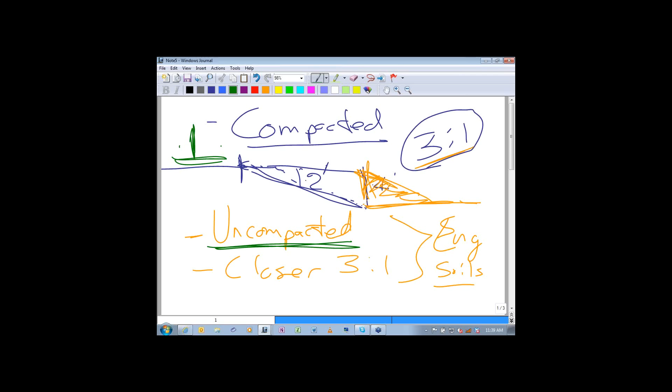Realize we can take 80% of the combined crane and load on one outrigger right here on the corner - crane plus load, 80% at one footprint. And we're pushing that soil, and if we're anywhere close to fresh soil that's been backfilled, any of those conditions, we're really going to need soil analysts to give us a heads up as to whether we have to go back and do compaction, get a bigger crane, and move back further so you can reach a greater radius. But it's really very dangerous.

Crane tip over - there's a lot of studies done, but certainly we know that from the personnel side, it is electrocution. So from the people side, we electrocute people, and that's the biggest issue with cranes. From the crane issue, it is loss of foundation, and that is, in our experience, the number one cause of crane accidents right there. It's loss of foundation - crane goes over. And that soils condition you just broached is probably the biggest contributor to that.

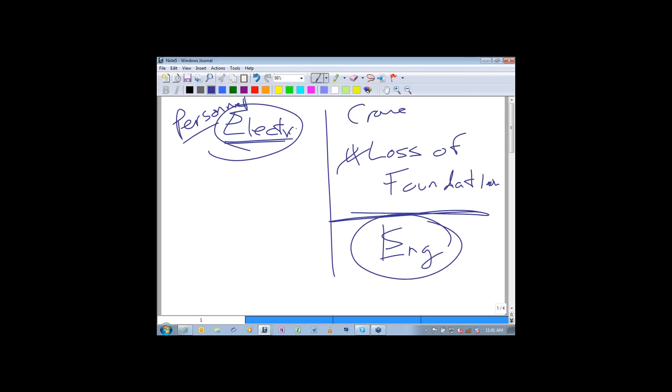I really want to encourage you, anytime we're working on any backfill area, we're just going to have to keep pushing back and build up. And even building bigger mats isn't always going to solve it. So I hope I haven't danced around the subject with you - I've really tried to give you some good target points to go after. But I'd have to say we're going to have to get engineering services if we get anything closer than that with uncompacted material. Good question, Brad, thank you very much. I appreciate it.

Okay, we have time for probably one more, so let me pull that one up really quick. It's Colm from Alstom Power, or Alstom Wind, I'm sorry.